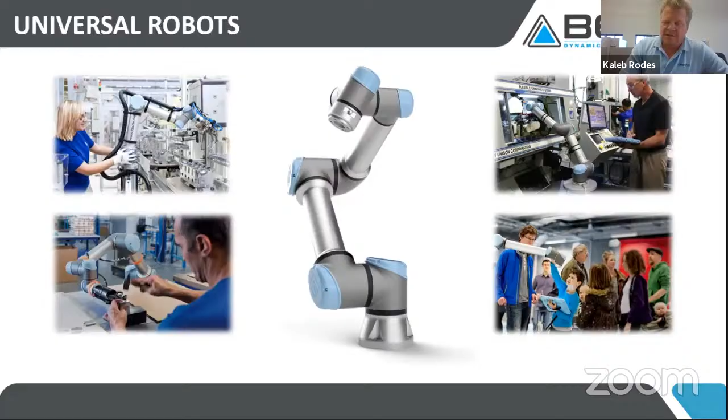We've been a Universal Robots distributor since day one in 2013. To our good fortune, we work with the best collaborative robot in the world. We've seen this emerge from the start as a tool that enables our customers and users to take hold of a robust 6-axis tool and learn how to teach it simply to do tasks that are important to their business. That's why this has been so successful in the market.

In order to solve problems for customers, we have aligned ourselves with a fantastic group of technology providers to the market, whether it's software products, 3D vision, mounting, dressing, end-of-arm tooling, or vision products. We can handle soup to nuts activity for a customer looking to do pick and place or machine tending activity, providing support around programming if necessary to get you started.

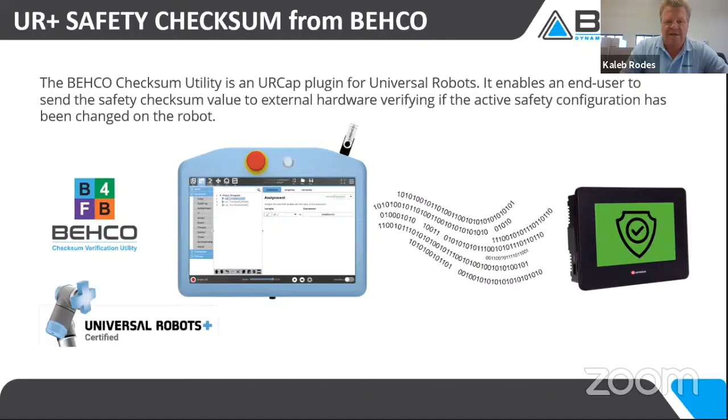I just want to talk again a little bit about the product that is coming to market. The CheckSum utility is going to be loaded into your UR robot as a URCap and then configured to allow a safety PLC to query the robot and verify its safety settings. We think this is important because it's a standard feature in the industrial robot space, and it allows the risk assessment, which in many cases has specific safety settings, to be protected from unintended consequences from a poorly managed change. This would sit on top of the robot software and ask the robot to verify that it has the correct safety setting. Roman will go into deep detail on how that's working for you, but we're very excited to be able now to present ourselves in the UR ecosystem.

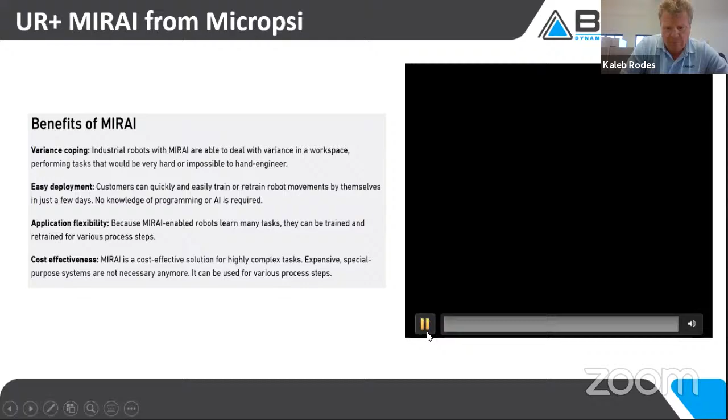The MIRAI system is going to, I think, show what the future looks like in robotic application space. Using vision systems tied with a force torque sensor, we're able to teach this system tasks which it's then able to accomplish regardless of the fixturing of the part. It will find the location, giving it hand-eye coordination and adapting to the real-world challenges of manufacturing tolerance. We see this as a breakthrough technology to study and see where it can take us.

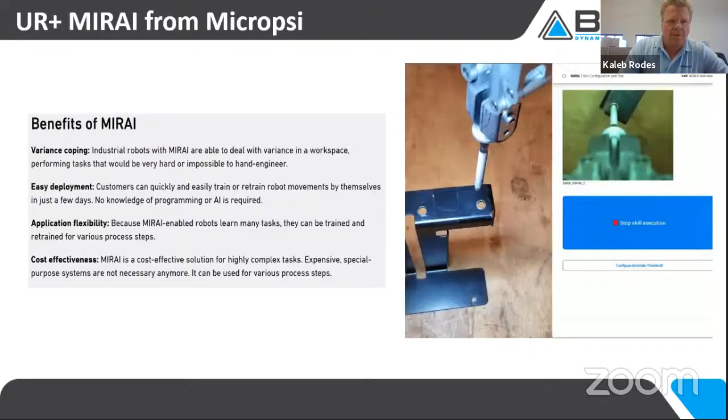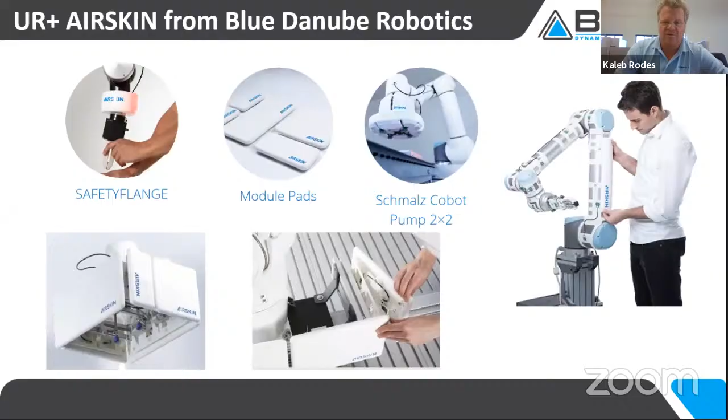We think this is a great alternative to the scanners that are being used, especially in any high traffic areas. And certainly with a light touch that Kaleb will show later, you can see yourself working next to the robot and not feeling the same level of concern, even with a force limited stop.

And then last of our technologies is the Canon 3D bin picking. This has been presented at previous tech takeovers. I think what's important to show here is that there are different sizes based on different parts. We're seeing this emerge again as a leading technology for companies looking for an enterprise solution. It can handle a vast variety of part conditions, and with the different options, it can overcome obstacles that would traditionally make the technology not usable.

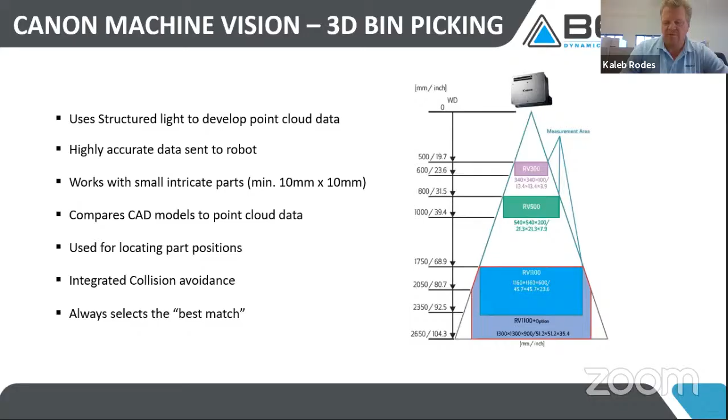To that end, we're excited to show this demo now where we can do work for you and feasibility studies to prove out whether you've got the right parts for this technology. So I want to say thank you again. I'm going to hand this off to Roberta and look forward to any questions she has. I'm going to moderate some questions for her after her presentation, so feel free to put those into the queue.

Welcome everyone. I'm here to talk a bit about safety and robots, because that's what I do. You'll get to all the exciting features that will be shown by the other speakers as far as how to make use of the robot, but I talk about how to make use of our robots and ensure safety of personnel. So, just what is a collaborative robot? This is sometimes called a cobot. After all, Universal Robots likes to say, we are cobots. We started it. We're the leaders in the world, and that is obviously a talking point of great pride.

But really this term started at, if you can believe it, a boring safety standards meeting in which we were talking about risk. And philosophically, the discussion came to: well, if a robot were to contact a person and the person is not hurt, why not allow the contact?

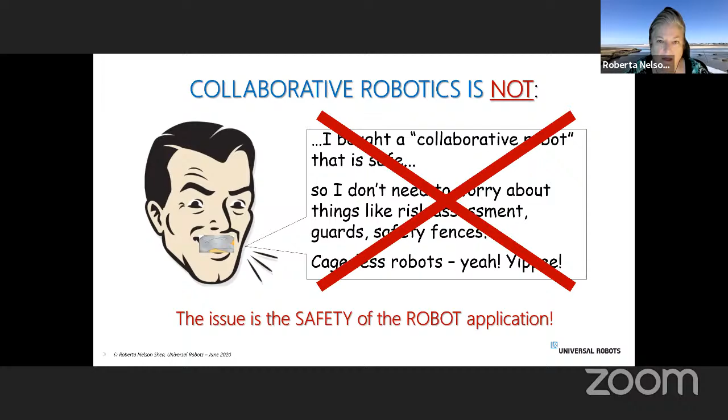But what we all have to understand is that this is not simply about the robot, it's about the application. So what we're talking about is an application where purposely designed robot systems work in direct cooperation with a human in a defined workspace. Collaborative robotics is not, I bought a collaborative robot that's safe, I don't have to do anything, I don't have to worry about risk assessment, guards, safety fences, cageless robots, yay, whoopee. That is wrong, that is a mistaken idea. The issue about safety is safety of the robot application.

So collaborative robots, officially from a standards viewpoint, there is no such thing as a collaborative robot or a cobot. Now, I'm saying that simply from a safety standpoint and safety standardization. But we still have all sorts of statistics and PR about collaborative robots and cobots. And if you think it's not an official term, but there's statistics, well, I guess that tells you the magic of marketing. So these terms really are marketing terms. They're not what's talked about in a standard.

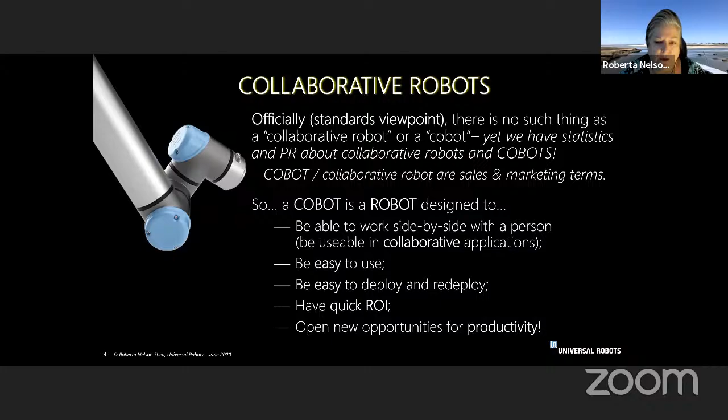But what is talked about in a standard, and what's talked about as far as expectations, are that a cobot is a robot designed to be able to work side by side with a person, meaning be usable in collaborative applications, that it's easy to use, easy to deploy, easy to get a very quick ROI, and to hopefully open up opportunities for productivity that did not exist previously.

So what we get involved in is more or less automating the dull and dirty. The payloads of our robots go up to just under 20 kilos. So we're not talking about the 1,000, 2,000 kilo robots lifting and moving whole car bodies. We're talking about smaller robots and applications that more often than not are dirty. It could be dull, it could also be quite lacking in ergonomics, and so therefore there's ergonomic hazard. So this is a good thing.

I'd like to point out this comparison between traditional robot applications—before collaborative robots—versus what we talk about now. I'd like to point out two points because I think this really typifies the comparison: fixed installations versus the possibility of flexible ones, and the need for extensive space requirements versus smaller space requirements. But this will seem quite obvious very shortly.

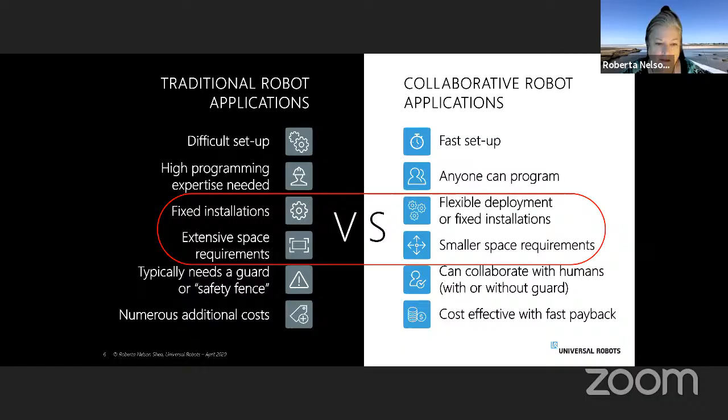On the left is a more typical or traditional robot application. You'll notice the size or scale of the robots compared to what you see on your right, which is basically a robot mounted to a tabletop. Due to the scale of these different installations, it's easy to imagine redeploying or moving the robot on the right compared to the one on the left.

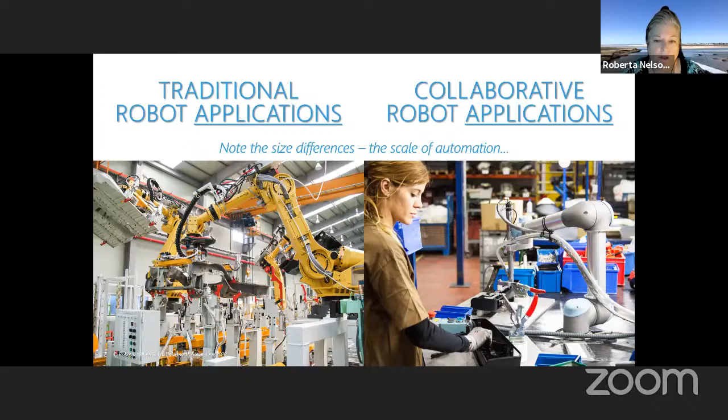It's quite easy to understand why we talk about a smaller footprint, because the robot occupies a smaller footprint. Those differences really come down to the size of the robot, not so much whether or not you use it collaboratively. Whether you use it collaboratively is what you see in the ease of use, and also in the expectations of safety.

The example on the left is the more typical traditional automation, in which you have fencing, or what people in the safety field simply call guards, that encase the robot application—keeping the automation separate from the people, and the people separate from the automation, so we don't have to worry about risks due to contact. If we look on the right, we do not see any physical barriers or guards separating the robot from the people around them. That's where we see the big differences.

But what enables these big differences? One small piece of it is the fact that it has a much smaller payload. But in reality, the difference between these sorts of robots is that the robot on the left likely only has two safety functions: the emergency stop and the protective or safeguard stop. Whereas the one on the right has either 15 or 17 safety functions—much more than just the emergency stop and the protective stop.

The additional safety functions are used for monitoring various attributes of the robot, meaning speed, force, power, axis position, and so forth—so that you have the capability of limiting how that robot operates, and doing so in a safe way. Whereas in the application on the left, the way of limiting is to limit access to it.

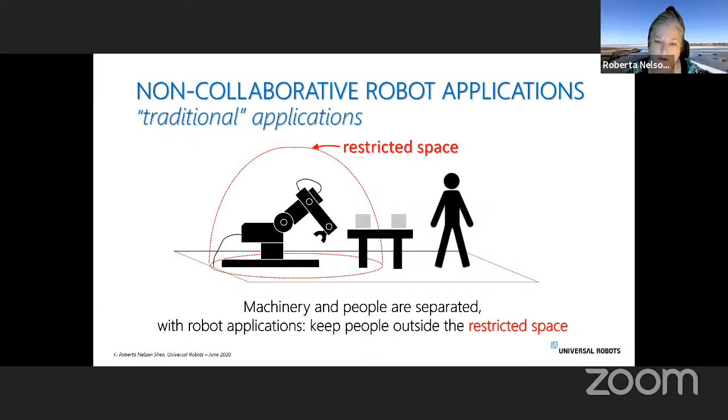So in these traditional applications, we kept everybody separated and people away. Again, this whole concept of the robot operating in one area and people operating in another—well, we don't have that when we talk about collaboration.

You see here an illustration, which I find humorous in some ways, but that's just me. Starting from the very bottom left, we've got a rather typical application. The operator and the robot application are physically separated—they both go about their business, and there's no touching, no interaction. If there is interaction, the robot is in a stop condition and the person can access it, then the person leaves, everything closes up, and the robot restarts.

If we go all the way up into the very upper right-hand corner, we're looking at a very high degree of interaction. But from my perspective—and my perspective is that of a safety person—I don't see any big difference between any of these applications.

The difference that exists is that we go up in the amount of interaction, and as we go up in the amount of interaction, you have increasing safety needs. But no matter what, there is automation and some degree of interaction. It could be in the very bottom left, completely separated—think of it like parallel play with little kids. Then we're still in the same situation in the box immediately to its right, which is what we see quite often with light curtains or safety scanners.

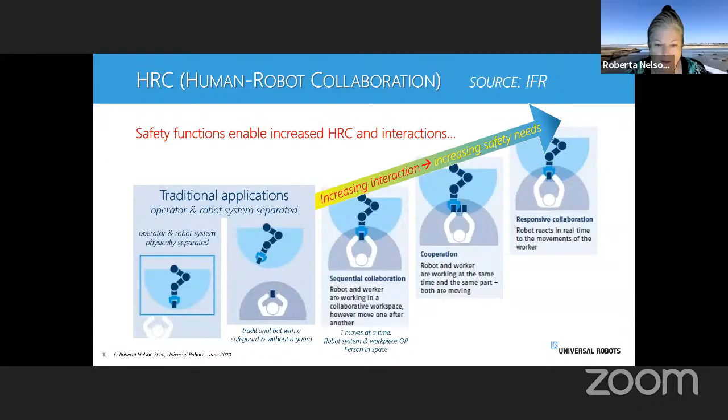Once we remove these safeguarding means that separate people, we have interaction, whether it's one at a time, same time, or highly interactive. Those are really all about the same thing—it's just, how do you provide for safety? We do that by safety functions that get described in safety standards, and within the user manuals and literature provided by robot manufacturers.

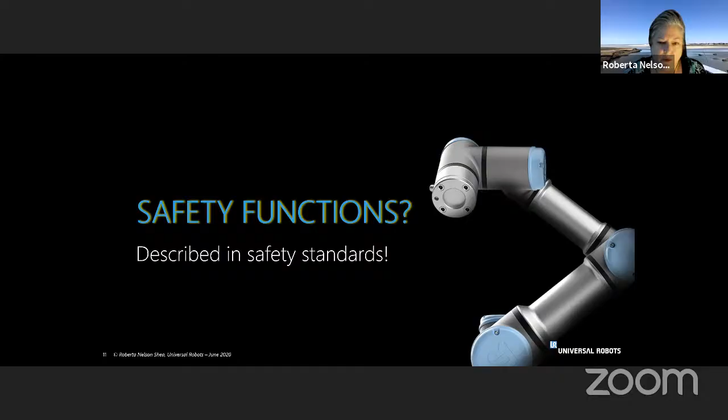The standards part of all this, that's really what I love, because that's the part I find to be the most fascinating. And yes, I know that's probably a bit strange, but that's me.

We have lots of safety standards, but fortunately in the world of robots, we have a very wonderful global situation in which the US's national standard is based off of the international standard. The international standard has, over a period of time, marched forward. It has been adopted in Europe—it's an EN ISO standard and harmonized under the Machinery Directive.

We also took that ISO standard and adopted it as the current revision of ANSI/RIA R15.06. There's no deviations, no changes from the international. Canada has done the same, with a couple of minor, very, very minor deviations. Japan, Korea, Australia, and more countries have adopted the ISO standards as their national standards, either directly, keeping the same nomenclature—saying it's ISO 10218-1 or -2—or under their own name, like what the US did with the ANSI/RIA R15.06, but that's a wrapper around the international.

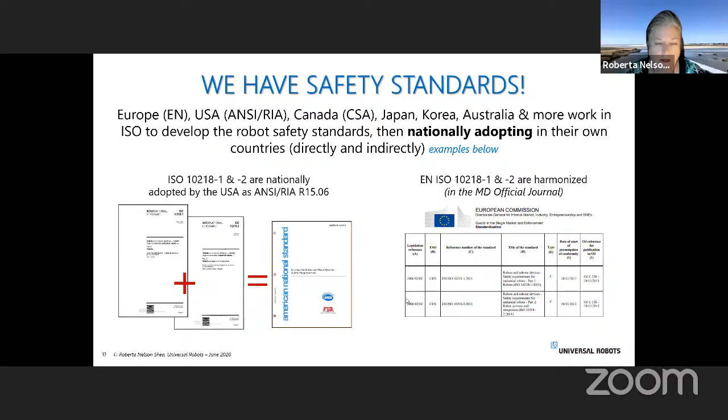So we have this wonderful situation where the same standard is really required around the world. I'm not aware of another machine used around the world having this wonderful distinction. It really does make life a lot easier for not only suppliers of the machinery, but also end users who have global operations. You can be very well assured that you're meeting 90 to 95% of all local requirements by following what's in the ISO standard.

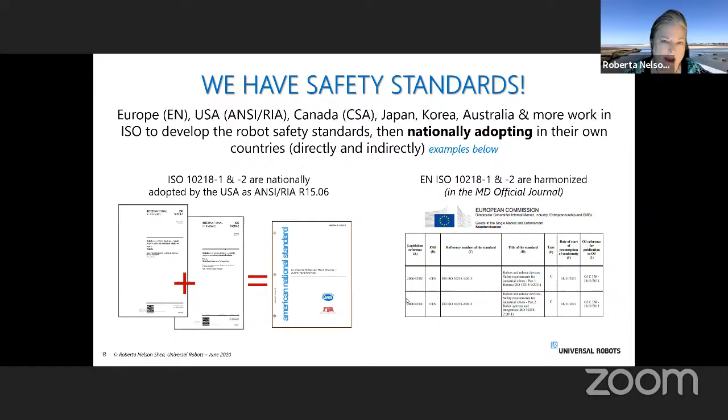You then have some small amount of national differences, typically around power and the like. So how can you be sure that whatever you're getting is safe? Meaning you buy a robot and you say, how do I know it actually meets the standard? Generally speaking, robot manufacturers do seek third-party certification. It is not a requirement to have third-party certification of robots, but most do so because that provides a safety net or comfort to the marketplace—we say we comply, but here an independent agency has reviewed everything and they say we comply.

That is also the case with Universal Robots products for both our CB3 series and our E-series robots. So we provide a lot of functional safety information, and I can tell you I have yet to see any other manufacturer provide as complete and useful information. Keep in mind, our robots then get paired with an end effector—we don't know which one.

They can be used with many, and we don't know exactly what the application is. You're going to see examples of various applications shown today, but there are many more. They're used for picking and placing, assembly, inspection, sealants, welding—all sorts of things.

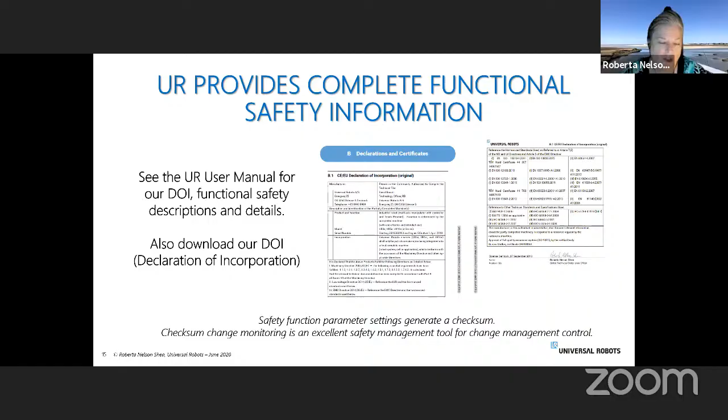So which part of these ISO standards applies to me? I'm saying me, trying to put my hat on for each and every person in the audience. If you're a robot manufacturer, part 1 applies to you. If you are an integrator or end user, part 2 applies to you, because part 1 is about the robot itself. Part 2 is about the robot system and the robot application, and it talks about putting everything together in the requirements.

Now, it's very important not to identify yourself by the purpose of your business. As an example, it is quite typical for end users to act as their own integrators. And when they act as an integrator, they're responsible for complying with the integrator requirements. So it is the role you're playing, not the nature of your business. Important thing to know.

Okay, part 2 is about the robot systems and the integration. The application determines the needed robot specifications, peripheral equipment, and any activities to do the job. The robot application includes that robot. So in the example of Universal Robots, either a CB3 series robot or an E series, an end effector, workpieces, and any other stuff, meaning equipment, hoses, cables, fixtures that support the application.

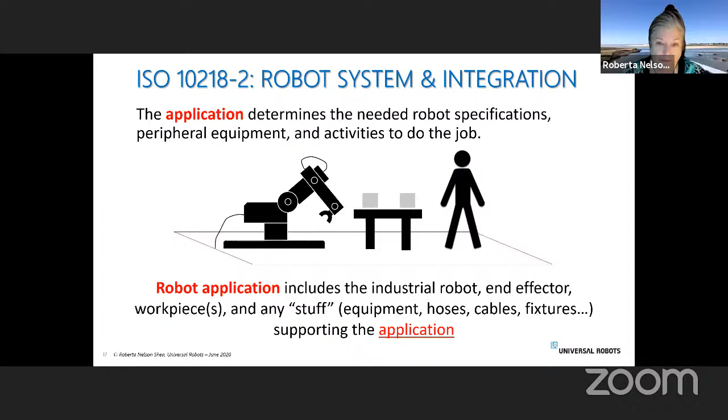Well, in addition to those two robot safety standards, one for the robot manufacturer and two for the integrators, there is also something called ISO TS 15066, and that means ISO technical specification. Now, a technical specification is not quite the same as a standard. If you want to think about it in order of priority or importance, a standard is number one. Technical specification is number two. Technical report is number three.

A white paper number four. And as you go up the chain towards a standard, you are going up the chain towards having a better grasp on what the issues are. So the notion of collaborative robots, collaborative applications, was quite new when it came out in the 2011 safety standard. So this technical specification was written to try to provide some more guidance and shape around how to do it.

So the technical specification means that it includes requirements. It can make normative requirements, but it cannot disagree with the standard that it supports. So this particular technical specification gets used along with part one and part two. As just an FYI, this particular technical specification was adopted as a RIA, Robotic Industries Association, technical report, and I have it listed here. So while it's a technical report in the US, it is a technical specification internationally.

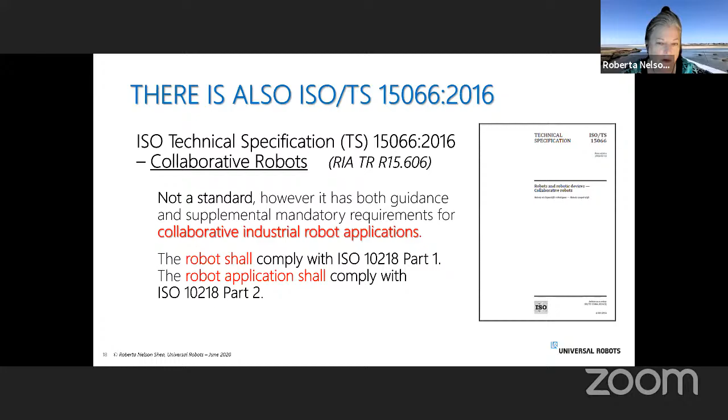Okay, I mentioned the restricted space. So in non-collaborative application, the emphasis is to keep people away from the restricted space.

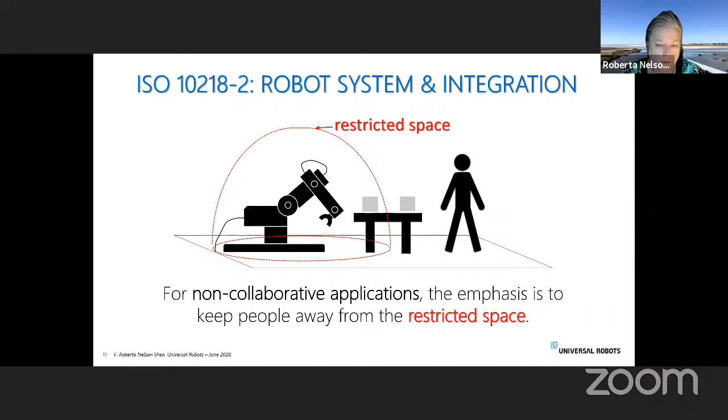But we don't do that with a collaborative application. Instead, we have to ask the question, how do we protect workers? Well, we have to follow the standards, the technical specifications, technical reports, and there are technical reports that are specific to robot applications. So what's the challenge of doing this?

And it's going to sound maybe a little flippant, but the challenge is reading and comprehension. And all I've got to say is don't give up.

First thing you want to remember is if you are planning to get a better understanding of a standard, read it cover to cover. Do not whip out the highlighter at the first page and pick things to highlight. That is not the intent. The standard is cohesive and it self-references within itself as well as to other documents. The most important thing is to understand the scope of the standard, what it's intending to cover and what it does cover, and then to read it cover to cover.

Give yourself a little soak time, then go back. A standard is not to be used where you do a word search and only look up the word you're interested in, because you will lose meaning and you will lose a fullness of understanding. So it's reading and comprehension. So just don't give up, that's all I ask. It does take a little bit, but you can get beyond it.

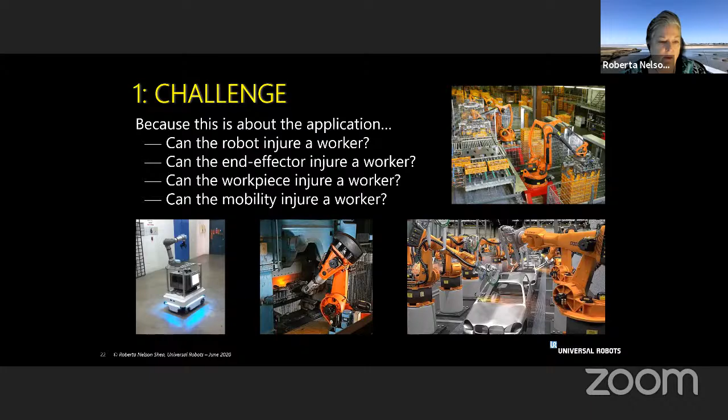Can mobility injure the worker? In the case in the very bottom left, as it's whipping around through the facility, is the issue of mobility the greatest risk? And if so, what are you doing to protect people from those risks? That could be as simple as safeguarding devices that will slow down that mobile platform, for example.

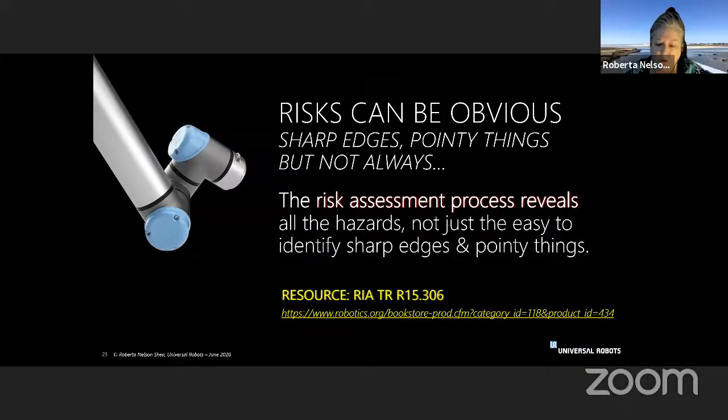And what I do need to point out is that risk assessment is scary if you've never done it before. Each time you do it, it becomes easier and easier. And all that it takes is a few under your belt and you say, risk assessment, I got this, I know how to do it.

I feel comfortable. The most important thing is do it, be consistent, and be thorough. But don't be paralyzed about doing it or not doing it.

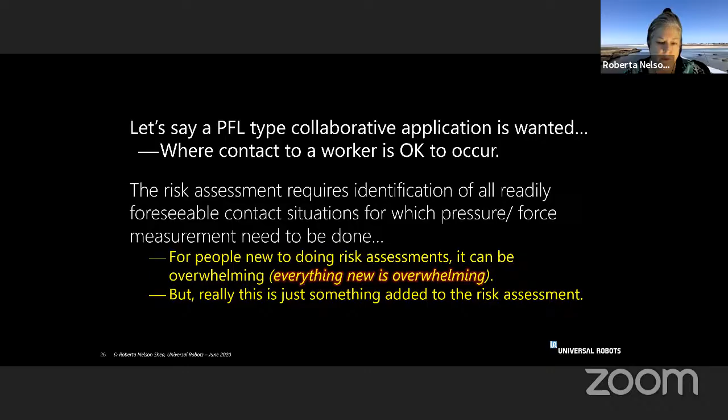Remember, I said it can be overwhelming to do the risk assessment, but don't be overwhelmed. The whole notion of the risk assessment, for context, if it's a power and force limited application, is just an added step, and you can get through all this. But let's say you're not prepared to expand your risk assessment—you don't have to do that. You can do speed and separation monitoring with our robot. If you are ready for it, there's another RIA resource to check you're not exceeding limits, for power and force measurements.

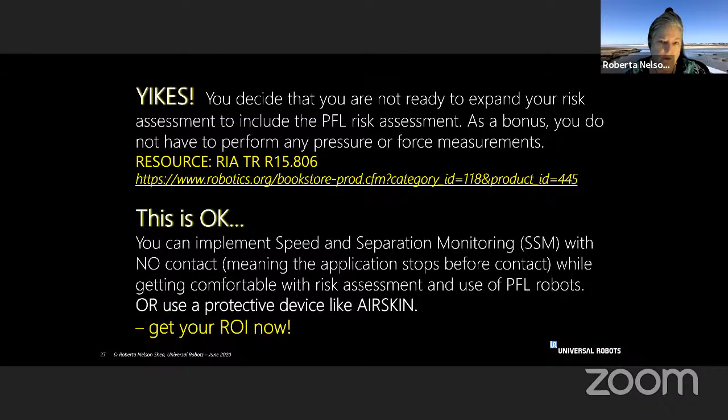So you've got all of these things, and you're also going to have a presentation by AIRSKIN, which is another technique that could be used—a nice start to doing your collaborative applications and starting very simply.

So with that, are there any questions?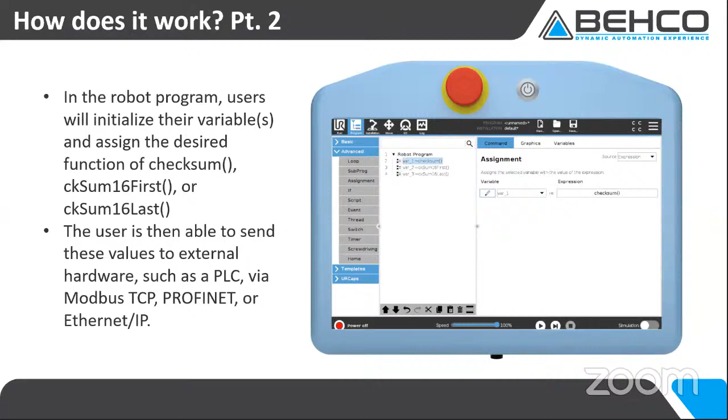The BEHCO checksum verification utility, as I said, is now available on the website. I'm extremely proud to present it, and that's really the whole gist of the utility.

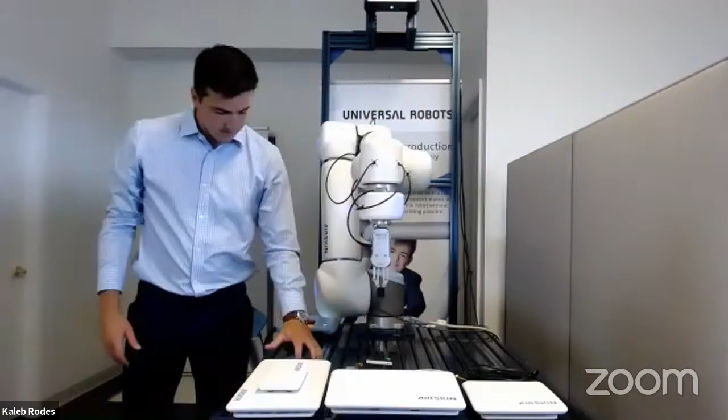Today I'll be giving you an overview of the AIRSKIN product along with a live demonstration. So what is AIRSKIN? AIRSKIN is a pressurized safety suit designed to wrap or box around your automation equipment. It is designed and manufactured by Danube Robotics out of Austria. The AIRSKIN product allows you to add a PLE Cat 3 safety certified product to your new and existing automation equipment.

Now the pads are all the same, made up of the same 4 components: an airtight hull, a pump, 2 sensors, and some electronics.

Controlling all of the pads is one microcontroller. The microcontroller has 6 wires here. The whole system is powered off of 24 volts. There is a ground wire, and then the remaining 4 wires are your OSSD signals, or your 2 redundant safety channels. Coming out of the pigtail here to the flying leads, this is where you're able to give your system power and connect it to ground.

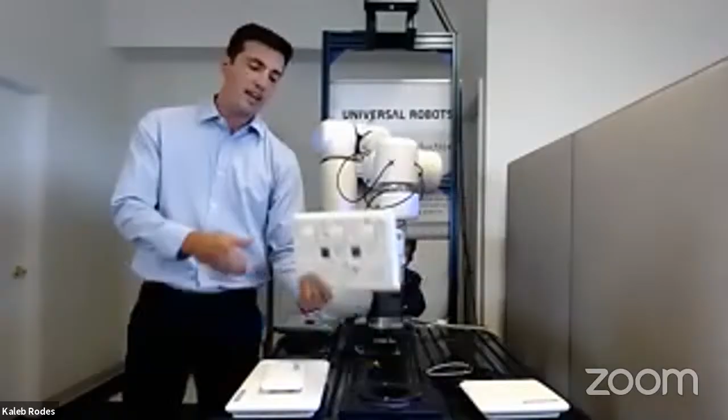The second product is what you see here on the robot, which again are these 3D printed brackets, but they're customized to the specific joint dimensions and the lengths of the arms to give that robot kind of an exoskeleton that wraps around the robot's profile.

For the robot's product for AIRSKIN, there is Universal Robots, KUKA, Denso, Mitsubishi, Staubli. They're working on a few others like Fanuc and Yaskawa that are to come out later in the future. The installation time for this specific unit on the UR10 was about 30 minutes. Now that I've done it once or twice, I could probably do it in about 20, so you get faster as you go.

The last product here is the safety flange, which is mounted directly between your robot tool bracket and your end-of-arm tooling. So it's this white pad you see here, which acts just like any other of the pads. The only difference is inside of this pad is a spring, and there are 3 different springs based on the amount of payload you have on the end of the robot. The first spring is between 0 and 2 kilograms.

The next spring is between 2 and 10, and then the third spring is 10 and higher, so they have different spring constants for different payloads on the robot. What the safety flange does is it detects axial motion, angular motion, and torsional motion of your end-of-arm tooling or collisions with a workpiece. It's a great product to add to any robot. The connection is the same. It connects to the last pad on your robot and has one input.

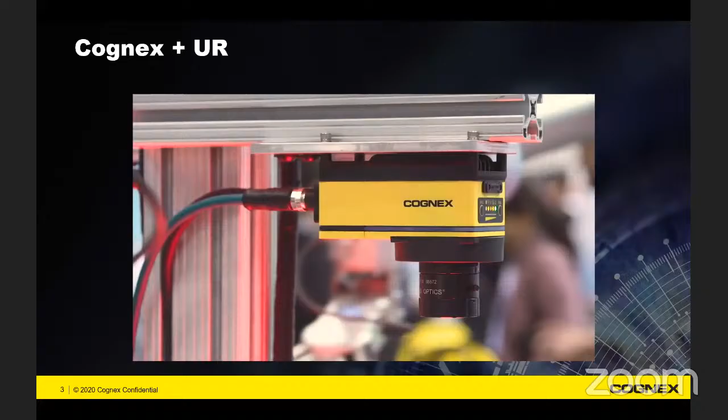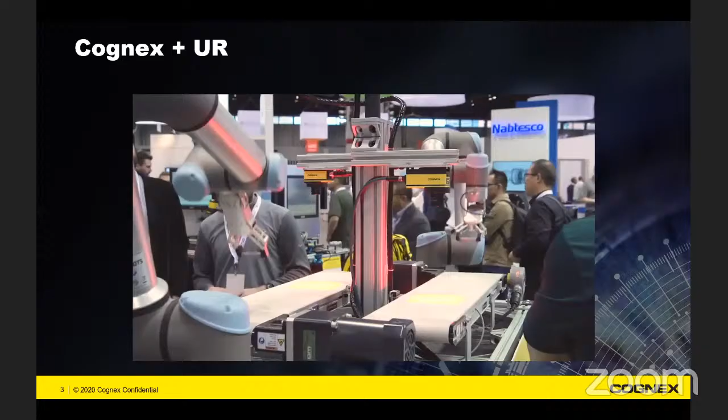About a year ago, Cognex developed URCaps, which essentially enabled Cognex and UR to seamlessly integrate with each other. Typically, with robotic applications with machine vision, it's fairly difficult to communicate between the robot and the cameras and to calibrate to find any parts in any type of movement applications.

Looks like the video is pausing here.

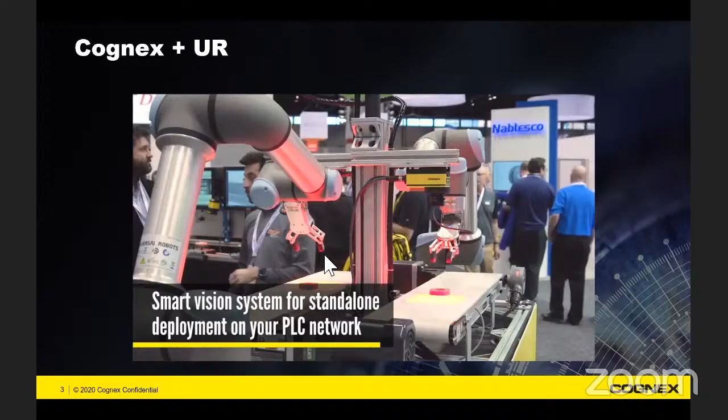So essentially here, you can see that we're fixturing off of this part. We're locating it and essentially sending those coordinates to the UR robot to do any type of pick and place applications. With all of our Cognex systems, they are smart vision systems, meaning you don't need a controller or a PC to process any of the equipment or communication protocols. We can develop your program and send that data directly to a PLC or UR robot.

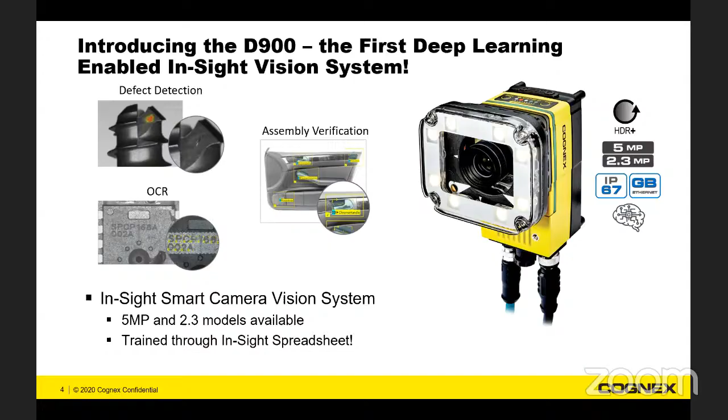So the next part of the presentation, I'll be going over our first ever deep learning enabled In-Sight vision system. Similar to the other Cognex systems, this is a standalone system, meaning all the processing is done on the Cognex camera. I'll go over some applications that require deep learning, some applications we can handle, and the features of it. At the end, I'll do a live demo.

Some of the features of the system: we have about 15 gigabytes of storage memory. The reason that's important is because when using AI technology, you need to train images and save images to your database and program. Having a lot of storage memory is very important so you can save those images with the job program and be online. This is IP67 rated, meaning it is rugged and meant for the factory floor.

We have a wraparound pass-fail indicator, so operators can see if you're passing or failing the job without even going to the system. We use 24-volt power, I/O, and Ethernet communication. We also have a third light port, so if you want to trigger and use external lighting, you can program that directly from the camera and power it as well.

This comes with Cognex ViDi, our deep learning algorithm, and it also includes HDR. For those who don't know, HDR stands for high dynamic range. Maybe if you're streaming a movie, you might see a little HDR symbol at the top right of your screen. Essentially, this enhances the contrast of your image or video quality. That's important in machine vision because you want high contrast in your part, and I'll show you why that's important to do any machine vision tools.

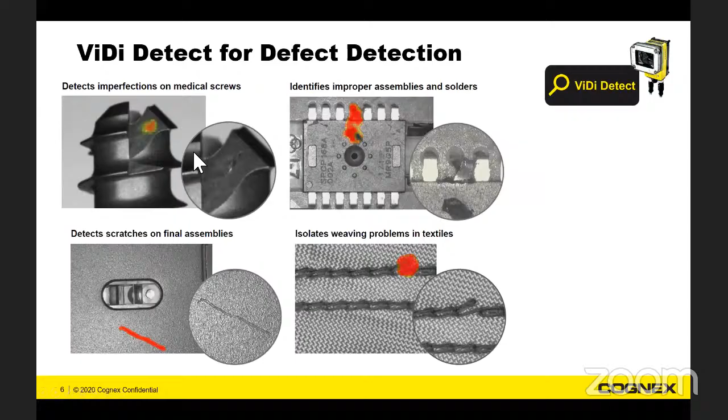However, using deep learning, we're essentially training on a subset of good images, or what the quality person considers good. By finding any anomalies in the image, our ViDi detection algorithm will find those anomalies and classify that as a defect.

The next deep learning tool we developed with the system is our OCR. For those who have done anything for serializing your parts, as far as reading the contents of your product, typically in traditional machine vision tools it's very difficult when you have curved surfaces or maybe your print quality isn't 100% from part to part. Maybe you have ink drip, or a very difficult to read direct part mark. Using our deep learning and training off of 30 to 50 images, we're able to account for all those variations.

A good example I like to use is with the 7. You can see how it's on this curved surface. The geometry of the 7 is going to look different here as opposed to over there. But to me and you, that both looks like a 7. So training a deep learning AI system operates in the same fashion.

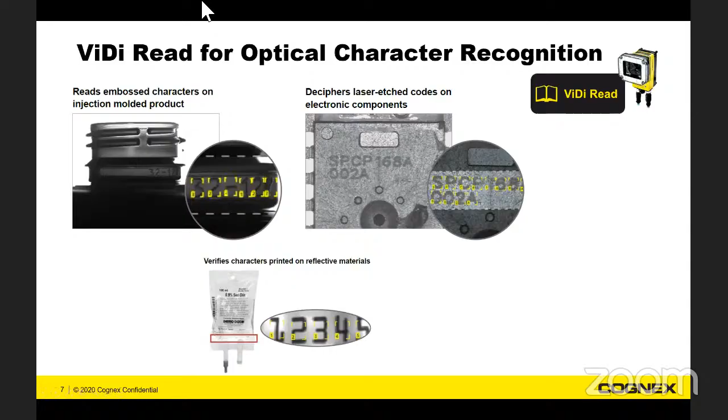Can everyone see my screen right now? Because it shows I'm sharing it, but...

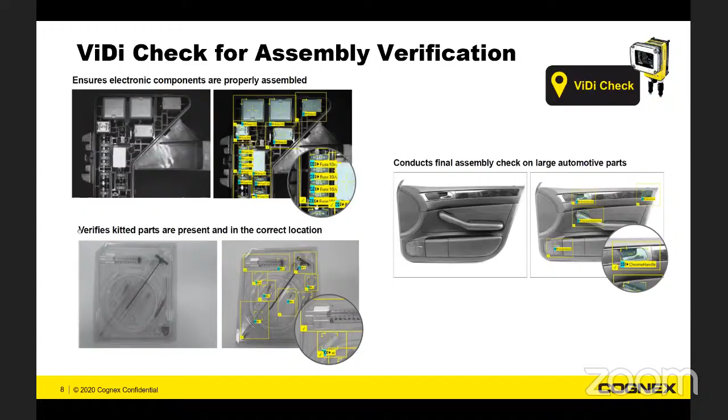So the last part of this is I'm going to actually do a live demonstration with the deep learning system. Obviously I'm not able to give this presentation in person, but this is the setup I have.

I have my In-Sight D900 system here, where I have a red integrated light and autofocus lens. As you see the live feed, you might see some red lights flashing, that's the reason for that. I also have a webcam here just to show what I'm putting under the system, that way you guys know I'm not pulling any tricks on you guys. I have this connected directly to my laptop, with an Ethernet cable coming into here. And I also have my development dongle, which is needed to train all of my images.

Now, the application I'm going to solve here is I have 4 different weave carbon fiber cards. You can see that the weave style is different as I go through my 4 different good cards. But I have some defects on the same weave styles. It might be a little difficult to tell because this is a fairly confusing background, but I have a little misthread right here on all these different cards. So with that, I am going to go into the live demo.

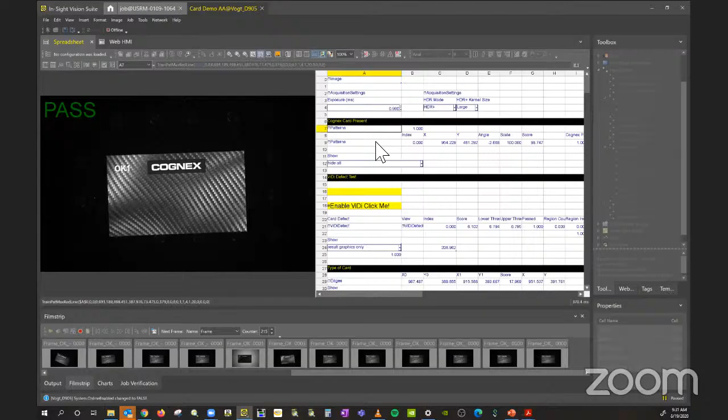To give an overview of the actual program, for those who are familiar with Cognex, we're actually utilizing our spreadsheet environment to make any programs. We have our toolbox here where I can use our traditional machine vision tools as well as your deep learning tools, and you can use them in conjunction with each other. So for this one, I'm actually going to train on this Cognex logo and use that as a fixturing tool. So as I rotate the part, it'll essentially move with it.

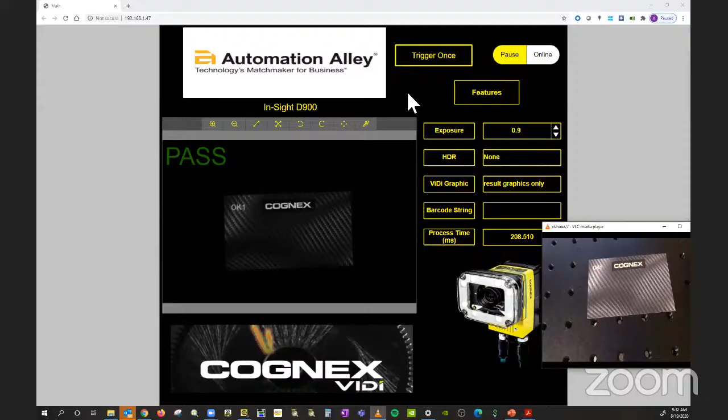Now with this system, we're also utilizing a web HMI interface. So with this, my URL is essentially just the IP address of my camera. And this allows me to make changes, look at the program, and kind of see how the program's reacting. So you could do this on your phone as long as you're connected to the network, things of that nature.

Now, at first glance, this is a pretty low contrast image. I have a black card on a black background. So if I trigger, you'll see the lights flash. Pretty difficult to see a lot of those features. However, if I enable HDR, which is what I talked about earlier in enhancing the contrast, you can see I get a lot more of those features with this card. Now I can turn the system online where it's going to constantly trigger and you'll see that red flashing.

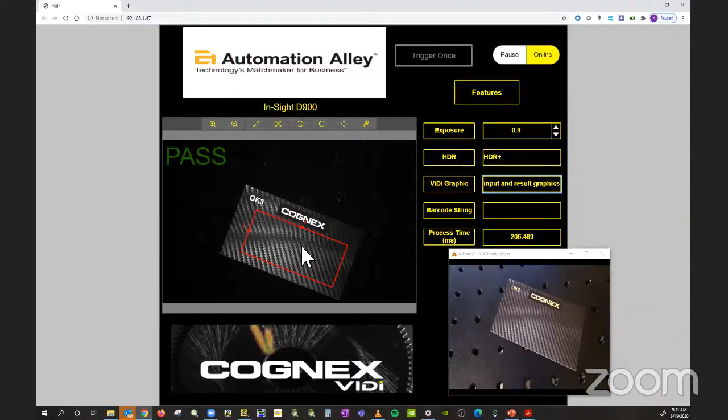Now if I rotate this card, essentially we're passing, and this ViDi graphic showing this red box is where I'm looking on this image, it will move as I move this Cognex card. I can place, that was OK1. Here's a different weave style, which is OK3. I can move this card as well. But what happens when I throw a defective card under it? You can see quickly as I put that under there, not only is ViDi locating where that defect is, but it's actually highlighting it as well. And if I hide this, you can see that's that defect. ViDi was able to identify that right away.

Let's say if I were to draw a little mark on this card as well, I'll try to time this out well. I did that pretty quick, but you can see that I have a little mark there. And if I hide this, if I zoom in, that was that mark that I just made with that pen. And I'm processing all of this within about 1/5 of a second here. I'll move this card around, you can see that it's continuing to find that. I get my hand out of the way, and then there's another one where I'm passing that good card as well.

And with that, we can also have some traditional tools with this. So as well as doing our deep learning and finding those defects, we can also read any types of barcodes, do any pattern matching as well. So here I'm reading this code, outputting the contents of the string, and you essentially see that.

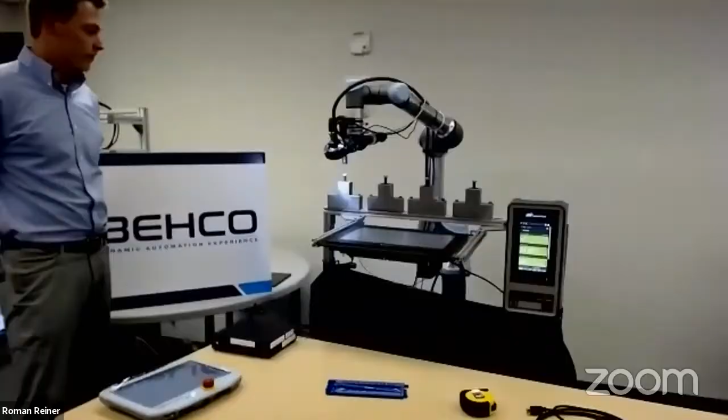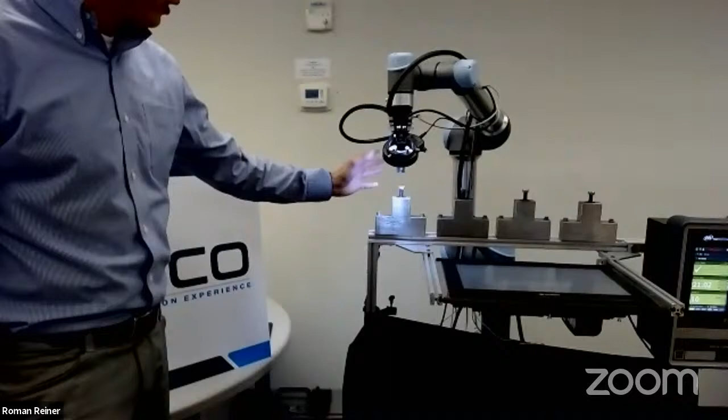I'm going to talk as I go here. This first fixture is going to be stationary, and you'll see I'll start at a reference point above the bolt and activate the MIRAI system. The MIRAI system will move to the top of the bolt and fasten it down. I'll do that first.

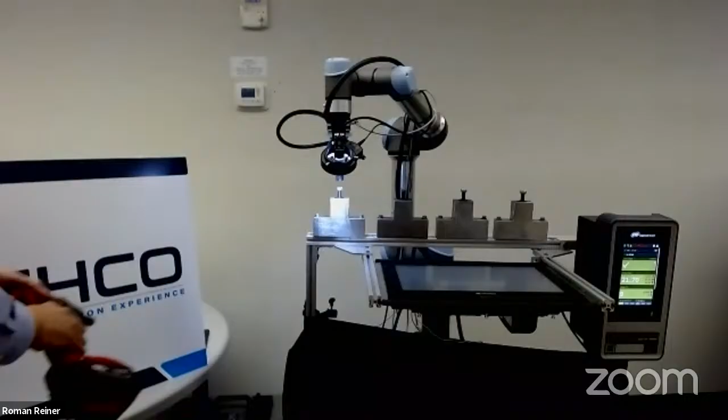As you can see, it found the bolt, engaged, and now it's going to screw. For the other fixtures, I'll show a little bit of randomness to demonstrate these aren't fixed locations. I'll move them a little left and right here, then fasten them down. Sorry if it's a little loud.

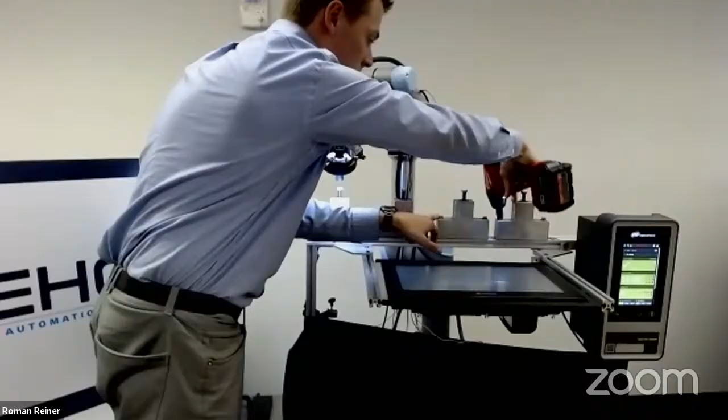Continuing on with the program, you'll see I'll start at another reference point above this fixture, activate MIRAI, and it's activated, skill complete, and it's torquing down the bolt.

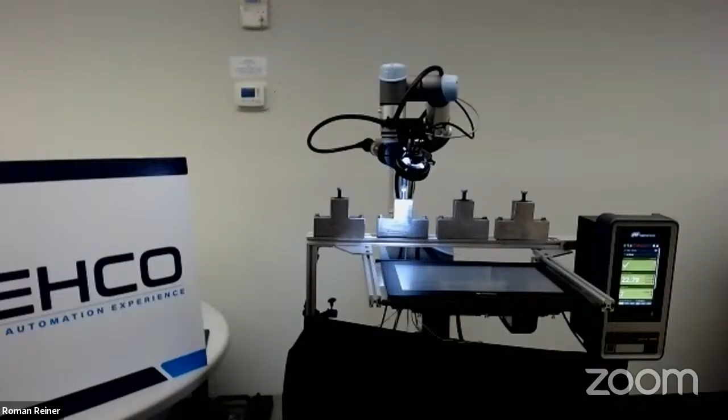I really like this technology, one, because I did most of the training on this fixture too and was just able to start from those reference points and activate MIRAI without doing any other programming. It was all generic for the other fixtures. Really neat tool, it uses machine learning to train through a Python server that communicates with this MIRAI box here.

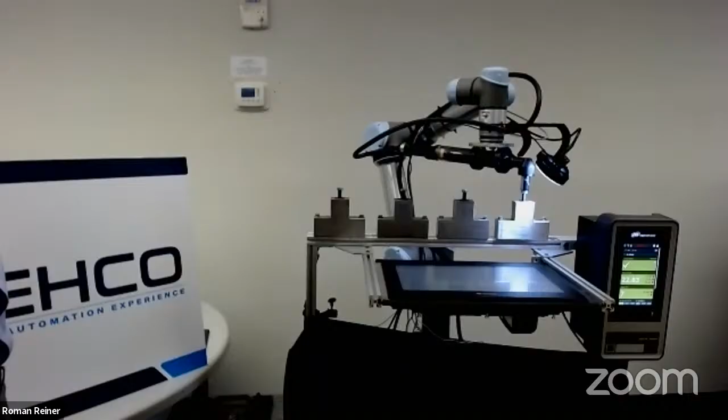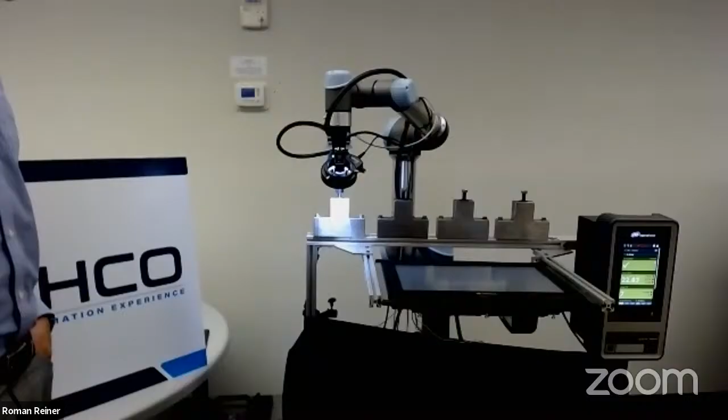As you can see, it was successful in all those fixtures. It was a good demo. With that, I could go through it again and demonstrate it a little bit more. After this is done, I'll pass it over to Caleb.

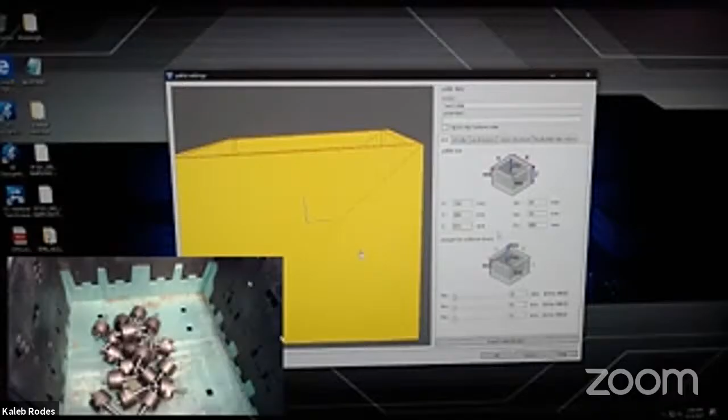So just a quick setup of the software. There are 4 inputs into the system. The first one being your bin or your pallet. These are all CAD models that are entered into the bin. For the pallet, you're able to enter in the dimensions rather than creating a CAD model. We'd recommend creating a CAD model if you had a more complex bin, something with irregular shapes other than a box or a rectangle. So that's the first input.

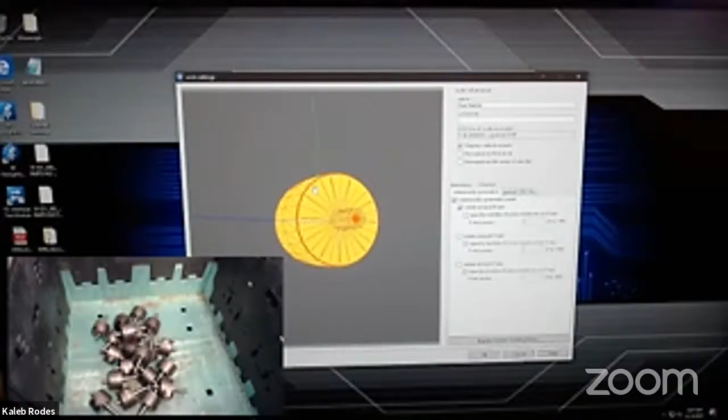The second input is your part, so CAD of the part. When we do feasibility studies, typically what we ask you is to send us a box of your parts. Between 10 and 30 parts is perfect, along with the CAD model of the part. The CAD model of the part is loaded into the system as a step file.

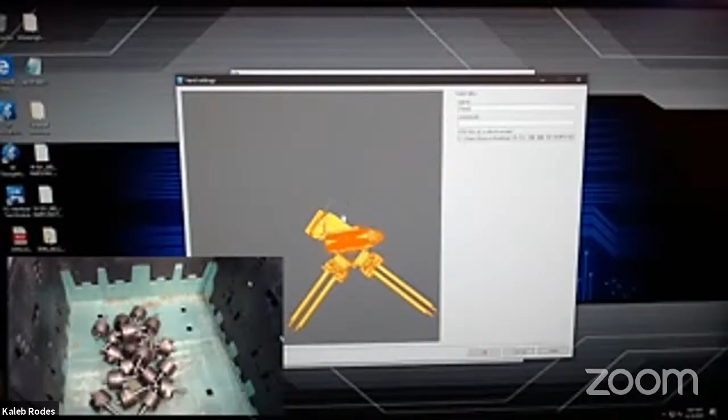The third input is your end-of-arm tooling, or in other words, your gripper. Here we have a pretty complex gripper, which is actually 2 grippers on a 45-degree angle to the tool of the robot. So again, that's loaded in as a step file.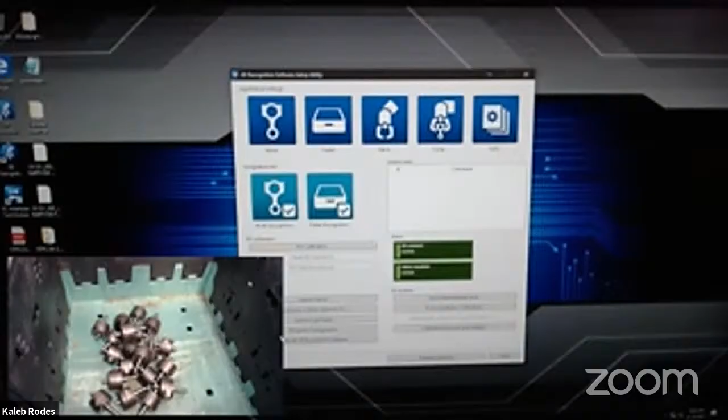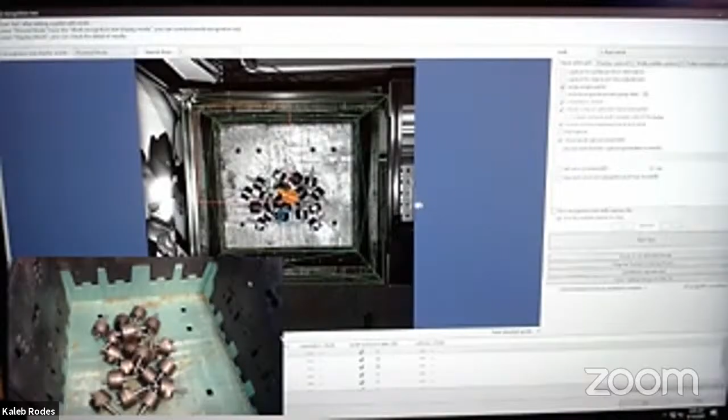When we go into work recognition, what it's looking at is taking all those CAD model inputs, and the Canon will take an image. It's using structured light to sweep across the bin. When it does that, it creates a point cloud of data, and that data is then CAD matched to the CAD model that you loaded in of the part. The other CAD models, such as bin and end-of-arm tooling, are specifically used for collision detection. That collision detection is either with the side of the bin or other parts that may be touching a part or underneath the part that aren't able to be grasped correctly.

So here we are simulating a feasibility test. We don't have a physical robot hooked up. Mike Folster, who started us off today, is acting like the robot. So I am cycling images here on the screen, and Mike is going in and picking out the correct part.

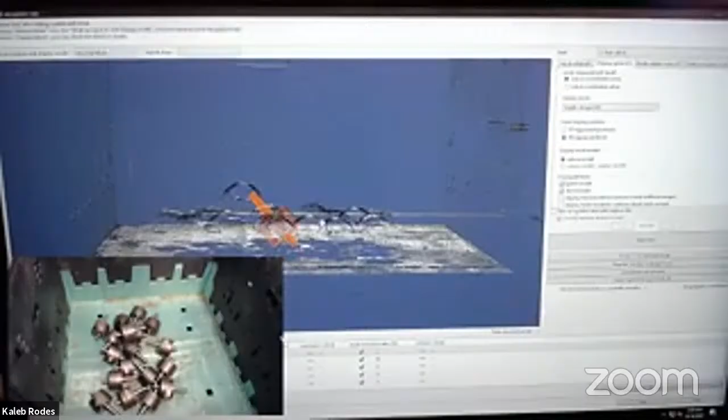If we switch views, so right now we're in a 2D image, we can switch to a 3D image, which is a depth image, and you can see the point cloud that the Canon generates. You can also see the CAD that's being matched to that point cloud. Hopefully you can see that correctly. If I zoom in a lot, you can get down to every single point. But we'll keep moving through here and have Mike empty the bin for us.

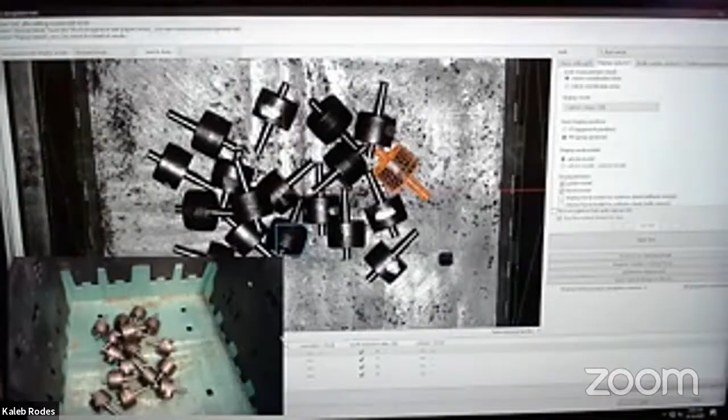So that's all I really have to add. Actually, no, it's not. There are a couple options to go along with the Canon. There are 4 options.

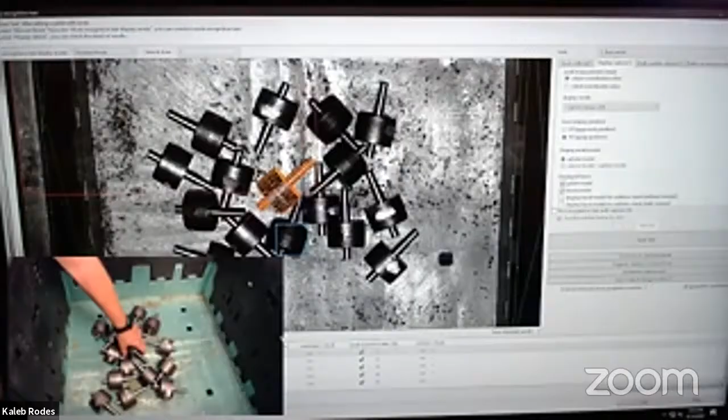The first one is partial part recognition. So what that does essentially is if you have a large part that expands beyond the field of view, we're able to look at just a certain portion of that CAD model, and then extrapolate and do work on the whole part itself. Also, if you have a part with a lot of variance, think of like a bolt with a floating washer, the partial work recognition will allow us to mask certain parts of that CAD out of the system. So we can get rid of that variance and just look at the head of the bolt if that's what we want to pick.

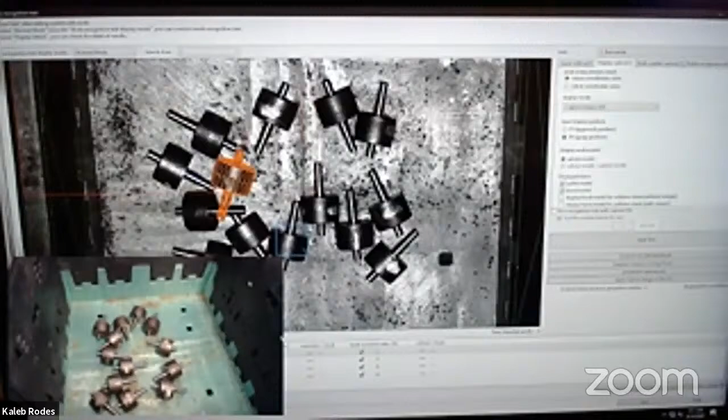The other option, consecutive recognition, is the most popular option that we typically sell in a solution. That really accelerates the cycle time of the application. So basically, with consecutive recognition, we're taking a scan, picking out the part, and then consecutive recognition is then taking a 2D image of the bin and seeing if any of the parts have moved. If none of the parts have moved, then we know that we have good points on the other parts, and we're able to go in and pick precisely on those parts.

So again, if you have demanding cycle times in your application, that would be an option you'd want to use.

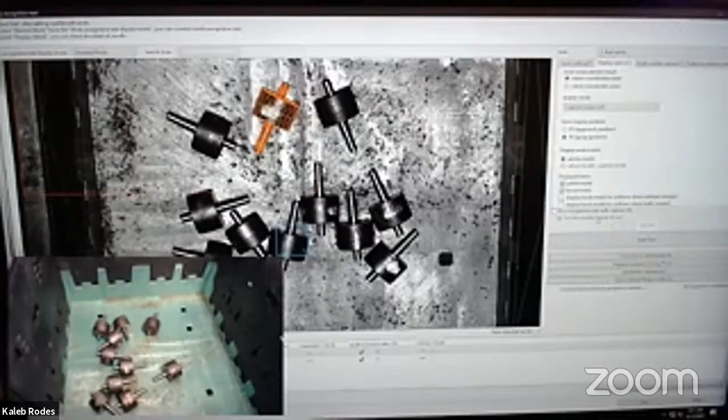Third is batch recognition or multiple bin. This allows you to handle multiple bins in the process. So under one field of view, you could have 2, 3, 4 different bins with different parts. And with one scan, you can pick up a part in each bin. You could essentially pick 4 parts from 4 different bins with one scan of recognition timing.

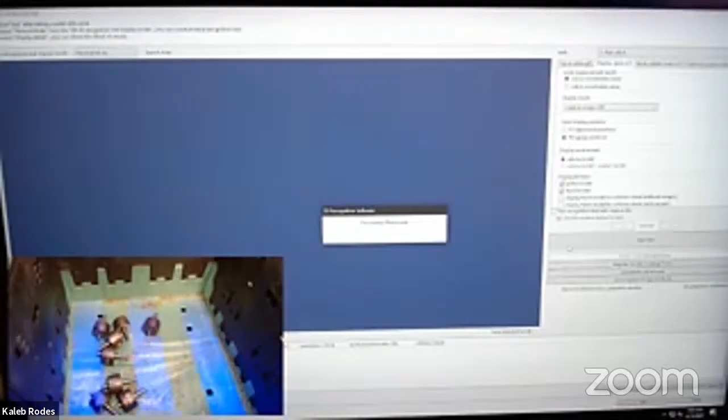Last is the slider mount option. This allows you to mount the 3D vision head to a slider or to a linear axis of motion, whether that's horizontal or vertical. Basically, say you have 2 bins and the first bin is empty. You want to slide over to that new bin of parts and start picking from the full bin. Also, if you want to get deeper down into the corner, so if you have a very tall bin, you could put it on a vertical axis. So basically what it allows you to do is take measurements from 2 different locations, essentially.

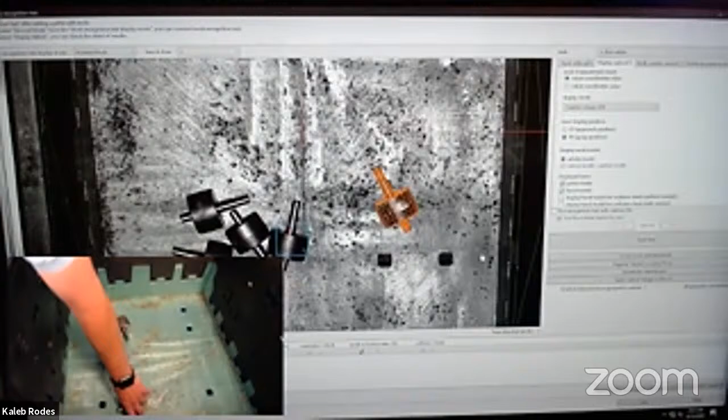That's pretty much it. If you have any questions, feel free to write them down. I'll turn it back over to Mike for the final remarks. So thank you for your time.

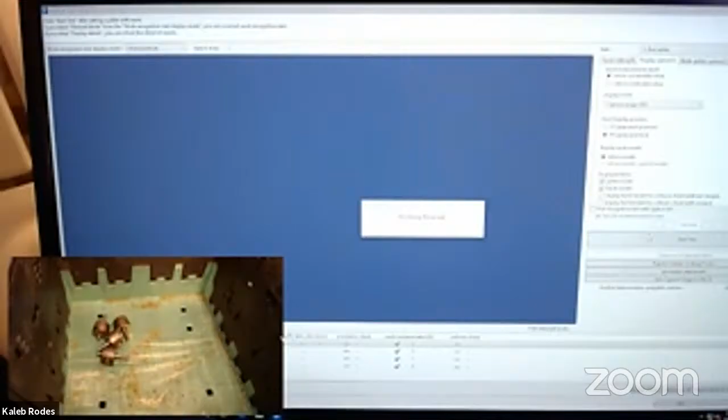You've been able to see here a number of technologies that are really on the doorstep of what Industry 4.0 is all about, whether it's the digital representation of product in a bin that can communicate to a robot, or if it's machine learning based on the ability to use the AI neural networking technologies from Cognex or from Micropsi. We're seeing now that emergence to simplify application deployment or expand the collaborative domain by taking robots to places where they would be challenged to work otherwise.